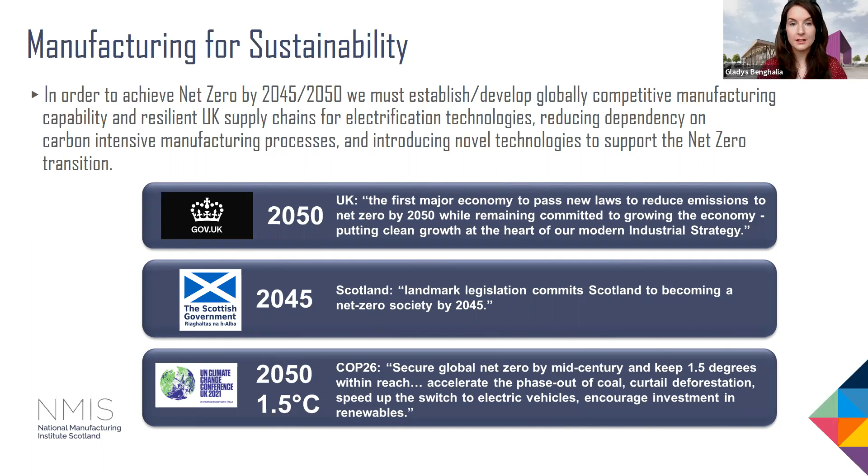Looking now at the economic opportunities aligned primarily with the programmes that NMIS is operating alongside and leading. We have our Future Electrical Machines Manufacturing Hub. This was commenced in 2019, and the drivers were the ability for the UK supply chain to accelerate, support, and really develop the capabilities in terms of manufacturing for electrical machines.

The markets there: there's a more electric aircraft market predicted to be at 11 billion by 2025. Global offshore wind was predicted to grow sixfold by 2030, and automotive electric motors estimated at 36 billion by 2024. So a huge market there and a huge opportunity.

In line with our Scottish Enterprise within Scotland, they have a national programme on zero emissions heavy duty vehicles, and this is really underpinned by the investment in electric vehicles globally being planned to reach 300 billion over the next 5 to 10 years. Again, a huge market there.

I'll briefly touch on the Driving the Electric Revolution Challenge, which Dan will go into in much more detail. This is a UK programme, a UK challenge where we are supporting the UK's push towards a net zero carbon economy, with £80 billion gross domestic product by 2050 being estimated.

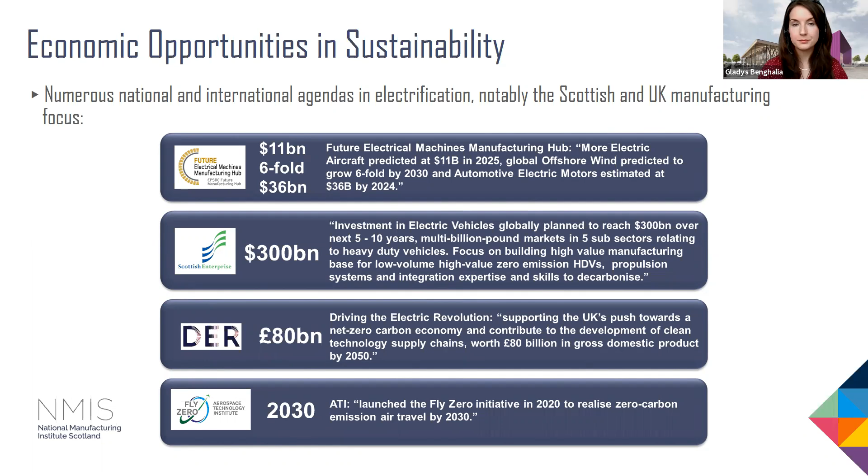Now moving on to the industry challenges we're working on with our industry partners at present. Number one is preservation. Clearly the last 18 months or so have given us unprecedented disruption within, for example, the aerospace sector. It's really about how we ensure our economy and manufacturing sector can recover and grow following this disruption. But we are not just looking at the aerospace sector.

We are understanding that as a Scottish manufacturing sector, we have a multitude of expertise that can be applied across sectors, and it is really about that revolution in power electronics, machines and drives across these many sectors to realise the design, manufacture and integration opportunities for increased power density and efficiency, reduction of weight, reduction of cost to manufacture, and reduce time to market.

That is important, particularly in the case of electrification, where time is of the essence. We have a lot of very tight time constraints now in delivering targets and ensuring that manufacturing can achieve those targets to the best of their ability. Reshoring, and sometimes the re-creation of supply chains within the UK to exploit these opportunities in a sustainable manner.

So sustainable manufacturing requires us to really consider the circular economy from day one. So integrating that into the design of any component of any system to really think this needs to be able to operate. It also needs to be able to perhaps have a second life or to be recycled. And it's really about that consideration at the beginning of that design process.

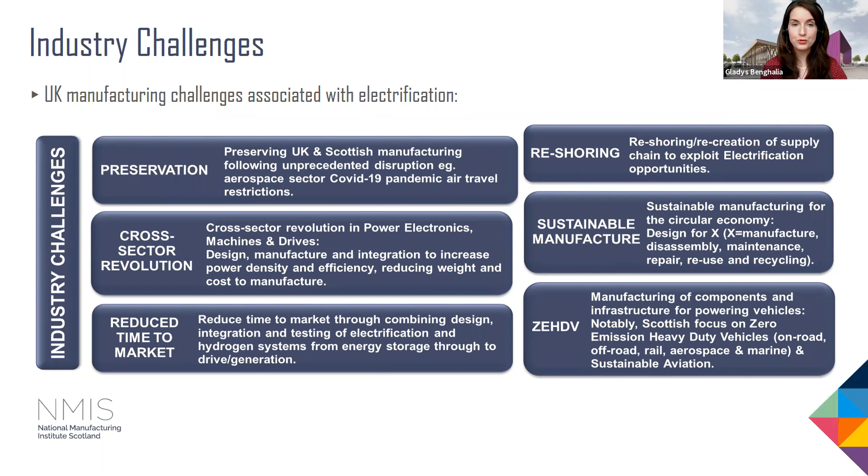So looking at a sector agnostic approach, again, the focus is increasing Scottish content and doing so in the best manner possible. So really understanding the skills that we have within Scotland and how they can be translated across sectors that companies may not necessarily traditionally have operated within, creating the right messaging across that so that companies feel comfortable to exploit opportunities, and NMIS can support them in doing so, de-risking that innovation, de-risking the requirement to upscale that manufacturing capability. And that's really done by focusing on components or task-specific manufacturing opportunities so that we do not alienate

Any organisations, any of our stakeholders within that process, and making sure that we can all work together to achieve that resilient supply chain. So just lastly from myself, looking at the NMIS vision and the approach, for those of you

That know the Advanced Forming Research Centre, you will maybe understand how we've worked. We are working no differently now in terms of electrification. And that is looking at operational performance and the impact that manufacturability and the lifing of materials has on that operational performance, reducing the time to market, production through optimised design and manufacture, revolutionising the design traditionally of components within power electronics, machines and drives, with a focus on sustainable manufacture and resource efficiency, and all underpinned by this want to shape and to grow industrial supply chains and innovation across sectors within Scotland and across the UK.

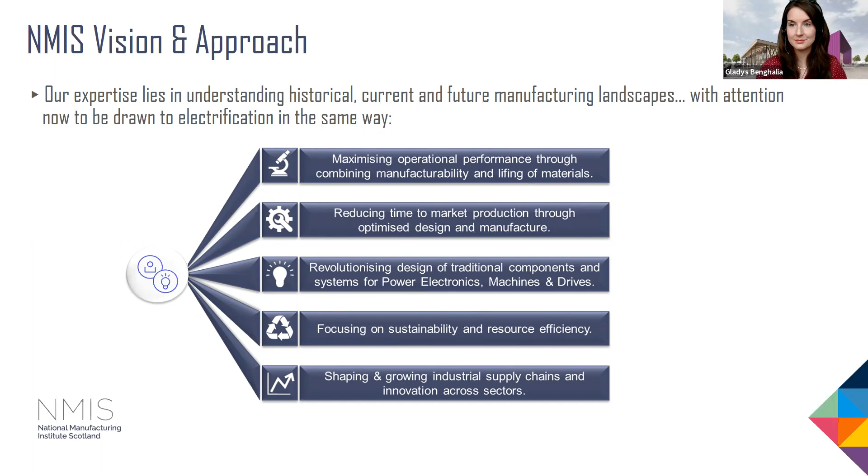So this morning I'm just giving a brief overview of DER-IC Scotland, what that means, and what we're doing in collaboration with NMIS to achieve the goals. So if you just go to the next slide, please, Alice.

So in terms of DER, it was launched by UK Research and Innovation as part of the Industrial Strategy Challenge Fund last year. It's now run solely by the UKRI. And what that looked like was an £80 million pot of funding, of which just under 30 million was invested into the academic network facilities in the UK to help scale up some of the equipment capability to support the UK manufacturing process for power electronics machines and drives. I'll come back on to what I mean by that in a second.

The 10-year vision for the centres is to make the UK globally recognised as the centre of excellence for power electronics machines and drives manufacturing processes. So the mission then is to provide a UK network of open access facilities for both our UK and global partners to grow world-class design, manufacturing, test and validation capabilities.

So what that looks like on the next slide, please, is a network of partners across the UK who are in 4 clusters, regional clusters, one in Scotland, one in the northeast of England, one in the Midlands, and then the southwest and Wales. The idea is building on an existing £300 million worth of equipment and academic capability across all of these facilities, bringing them together, and then the additional investment of £30 million to kind of fill key gaps and rapidly scale up the capabilities of the centres.

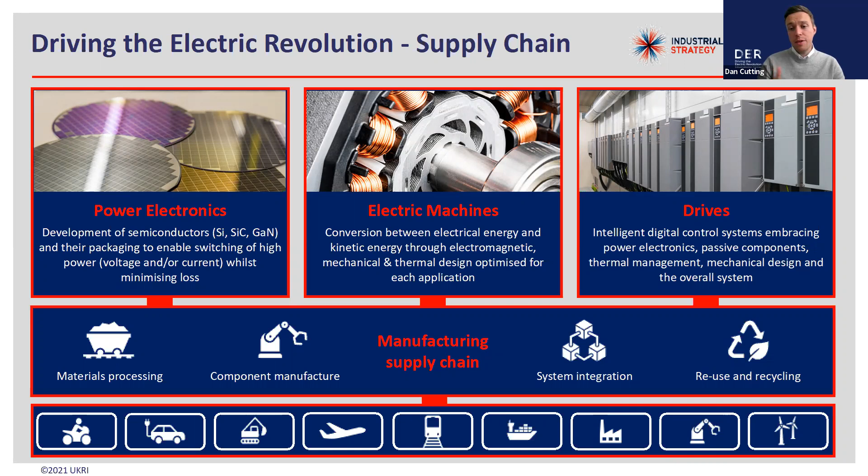And then drives are essentially embedding intelligent control into machines and power electronics, so that we have a controlled system which allows you to look after thermal management and have a bit more control over that as well. So what do we mean in terms of the manufacturing supply chain? DER is interested in everything from materials processing right through the life cycle to reuse and recycling. That'll tie in a little bit into what Gladys mentioned earlier on. And as I mentioned, there's 9 sectors that we're currently covering.

So in Scotland, we are supported by 4 universities: University of Strathclyde, which hosts DER-IC Scotland through the PNDC, the University of Glasgow, University of St Andrews, and University of Edinburgh. Each university carries a slightly different focus. The University of Strathclyde, energy systems primarily, is what drew the centre to being hosted by Strathclyde - a lot of experience in developing electrical systems through modelling and demonstration at the likes of the PNDC facility, and then a lot of work in terms of looking at power electronics, drives, and electrical controls.

The University of Glasgow, specifically their James Watt Nanofabrication Centre, are focused on power semiconductor devices, primarily GaN, gallium nitride, and they're a clean room facility at the University of Glasgow, where they have a lot of equipment focused on manufacturing processes and semiconductors. The University of St Andrews are primarily hydrogen and battery experts. And one thing, taking the systems approach in Scotland that we were cognizant of, I suppose, was that the development of drivetrains in electric vehicles or in aircraft, it's going to be dependent on whatever energy vector you choose.

If you want to power your system with batteries, you're going to have an impact on the adjacent power electronics and machines. Likewise, if you use a hybrid approach with battery and fuel cell, we need that expertise and we need to tie this in. So in the longer term, we need to understand how the impacts and is impacted by things like battery developments.

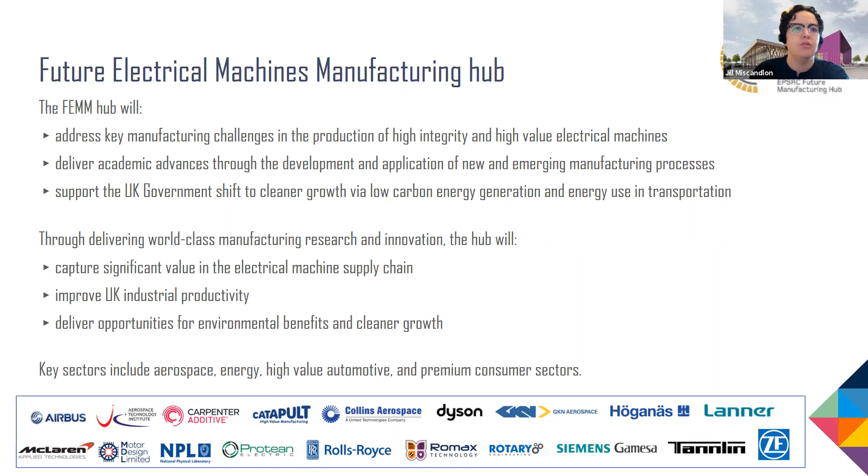The FEMM Hub is a 7-year project split up into what we term grand challenges. The first grand challenge is really looking around manufacturing-led innovation. One of the key aims is to bring manufacturing opportunities and considerations right to the initial design stages of electrical machines, to ensure more efficient and quicker development, but also to open up design opportunities by implementing new manufacturing processes that weren't available 10, 20, 30 years ago, allowing for new designs and new combinations of components.

The second grand challenge is looking at process innovation and simulation - trying to understand how we can define processes better, how we can have better control over them to really get high performance and ultimate control of everything that gets manufactured. That will be through the development of new manufacturing and assembly techniques, and also through in-process tracking and traceability, so we can perhaps ensure zero defect components are manufactured, and detect any manufacturing issues in real time, as opposed to waiting until things are assembled and end-of-line process testing.

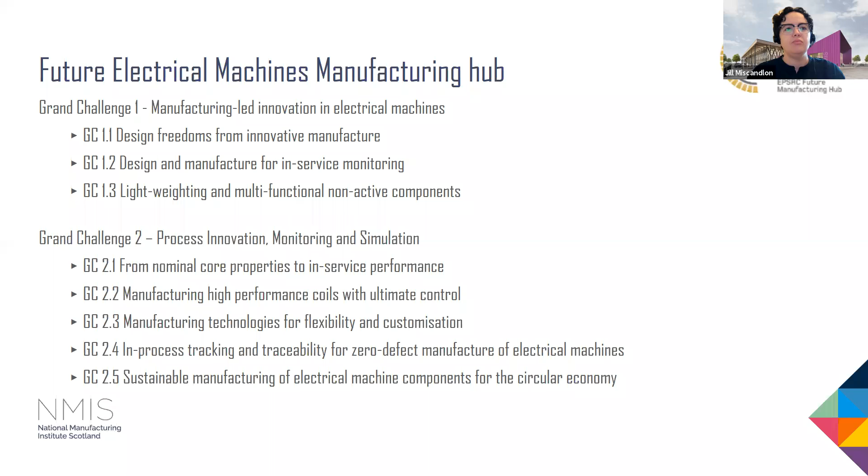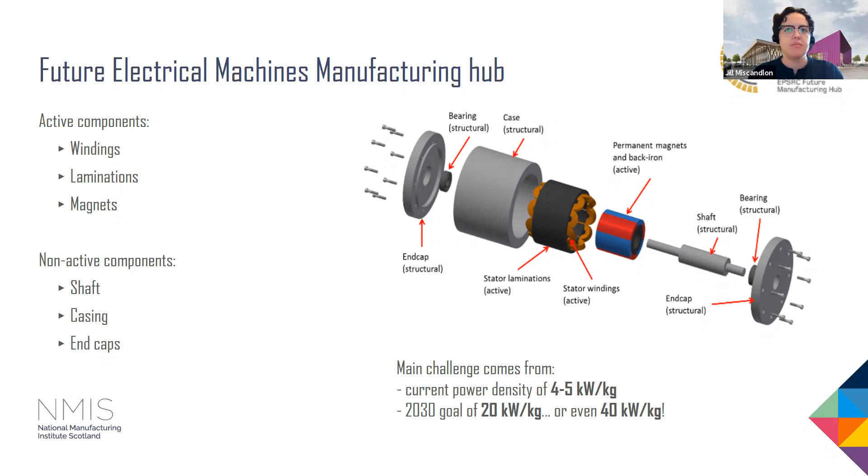Electrical machines are a clean way of generating electricity and power. However, the manufacture of these machines is not as green as it could be - they're not optimized in terms of some of the issues we see with it.

The copper windings are coils which are drawn, then wrapped in insulation, wound round the central stator and compressed in place. To help with the compression and also the thermal conductivity, they're often dipped in resins, so they're fully encapsulated in a resin. This helps with performance and in-life optimized service. However, when you come to the end-of-life process, the resins are extremely difficult to remove and cause a lot of issues. The steel laminations are extremely thin sheets of electrical steel, between about 0.2 and 0.4 of a millimeter in thickness.

Because of the thinness of the sheets, they typically go through multiple sheet rolling operations. Once they're at the final thickness, the components are then stamped into their required geometry. But with that stamping operation, there's usually a high amount of wastage of the materials. And then everything, when it's put in the assembly, everything's glued together, which again doesn't help with the end-of-life processing of these materials. The permanent magnets in the machine, obviously with magnets, there's a lot of mining operation in there.

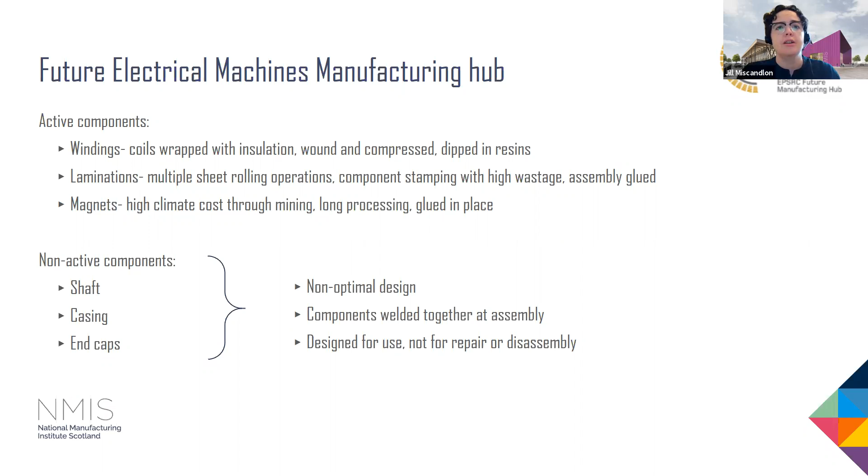So in terms of the technology development that we're trying to do, there is obviously, with the grand challenges that I showed right at the start, lots of different design issues that are trying to be resolved within the FEMM hub in general. But what we're trying to do is, while we're doing all the technical design work and the challenges of increasing the power density of these machines, we're trying to put the circular economy of the machines and the sustainability of them right at the forefront and make it an integral part of the conversation.

So within one of the work packages that I'm leading, we're looking at developing a methodology which integrates the design and the manufacturing of these machines so that they're essentially acting as two modules which talk to each other. So you're not just having the linear approach where you design a component and then it goes and you try to manufacture it.

But like I said earlier, we're trying to take the aspects of the manufacturing which can actually get us benefits that previously we couldn't get, so that you can then feed that back into the design and you have this iteration. So at the moment, we have the design constraints and the manufacturing constraints locked in, and we're developing work on just those two. But really the long-term goal is that we have multiple modules which can all interact with each other so that you can actually get a fully optimized solution at the end of the work that you're doing.

So these can involve things like life cycle assessment of the components in the machine, also things like process modeling. So at AFRC and LMC, we've got large teams of process modelers, and the idea behind that is if we can do a lot of things computationally, then we don't have to waste materials and waste energy actually doing physical trials. If we have process models that we can trust, we can reduce consumption and we can also speed up the process as well.

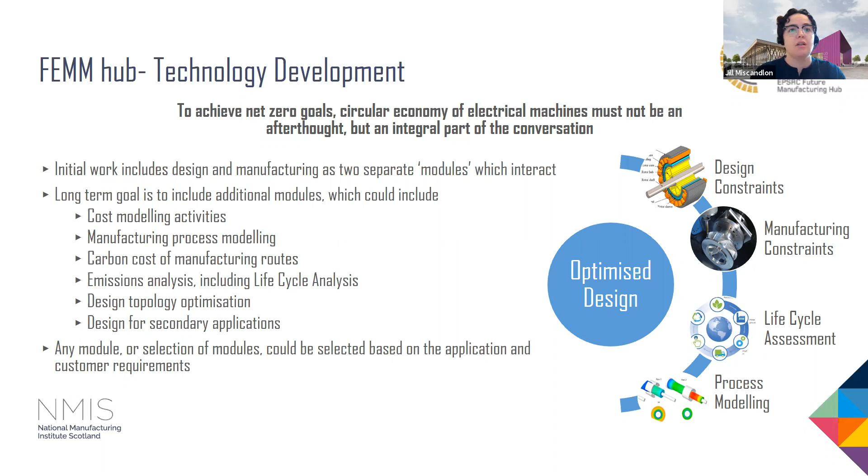So that was just a very brief overview of some of the technology development we're doing, but with Grand Challenge 2.5 and the FEMM Hub in general, what we're also trying to do is help develop a supply chain. So we've been doing several activities in the last few months looking at developing the understanding of what is currently going on in the UK supply chain.

We've got an industrial survey which is live at the moment, trying to understand the circular economy and remanufacturing, reuse activities taking place in the electrical machine supply chain. We'd welcome anybody to please submit to that industrial survey if this is an area you're working in. What we're trying to do is really understand what supply chain we have at the moment to be able to identify gaps, so that we can help through NMIS, through DER and through the FEMM Hub develop that supply chain into something that's fit for purpose for the future of the reuse and recycling of these electrical machines.

We've also recently produced a review of the circular economy research specifically for electrical machines, and that paper is available online. If you have any issues accessing it for whatever reason, feel free to email me and I can send you a copy of that paper.

But that really sums up the work that's going on currently for circular economy of electrical motors, and also looking at how we can potentially use industry 4.0 technologies to help develop this work and really optimize what we're going to be doing in future.